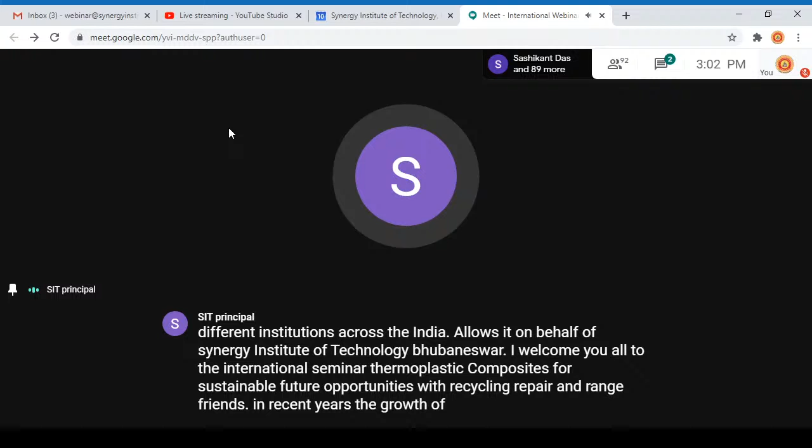Friends, in recent years, the growth of continuous fiber-reinforced thermoplastic composites shows opportunities in transportation, aerospace, defense, industrial, renewable, and sporting goods. The global market of CFT is expected to grow at a compound annual growth rate of 9.5% from 2017 to 2022. The major driver is the growing demand for thermoplastic composites in different industries due to its higher performance and environmental benefits.

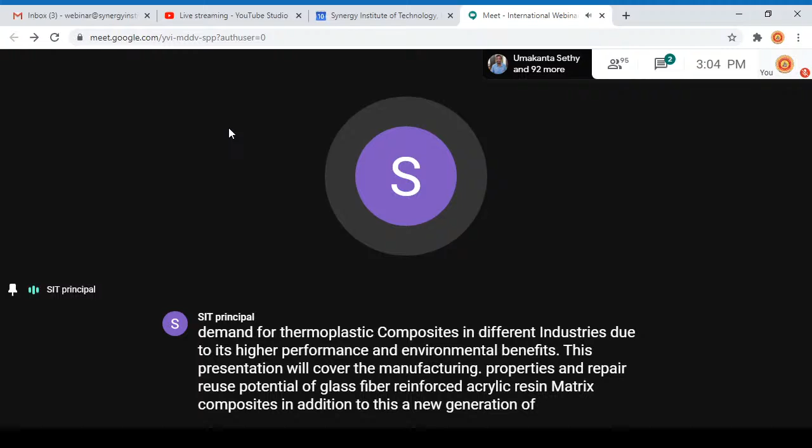This presentation will cover the manufacturing, properties and repair-reuse potential of glass fiber reinforced acrylic resin matrix composites. In addition to this, a new generation of low-cost thermoplastic fiber metal hybrid laminates will be discussed by our esteemed speaker.

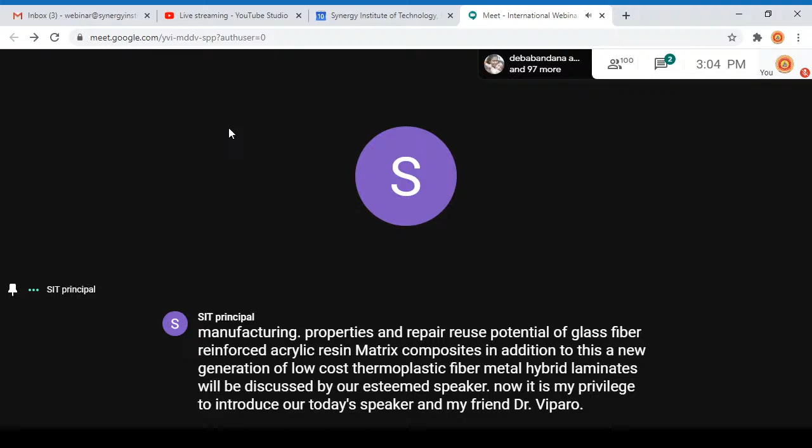Now it is my privilege to introduce our today's speaker and my friend, Dr. Dipa Roy. Dr. Dipa Roy obtained her BTech and MTech in Polymer Science and Technology from University of Calcutta, India. She completed her PhD from Indian Association for the Cultivation of Science, Jadavpur University, India in 2002.

Dr. Roy started her job as lecturer in the Department of Polymer Science and Technology, University of Calcutta in 2005 and continued till September 2011. In 2011, she joined the Irish Centre for Composite Research at University of Limerick, Ireland as research fellow up to 2016.

She successfully completed 7 Government of India funded research projects as principal investigator. She has supervised 12 PhD students and 8 MTech students. Presently, Dr. Roy is a faculty at School of Engineering, University of Edinburgh, Scotland, UK. Now, I request Dr. Roy to present her webinar topic.

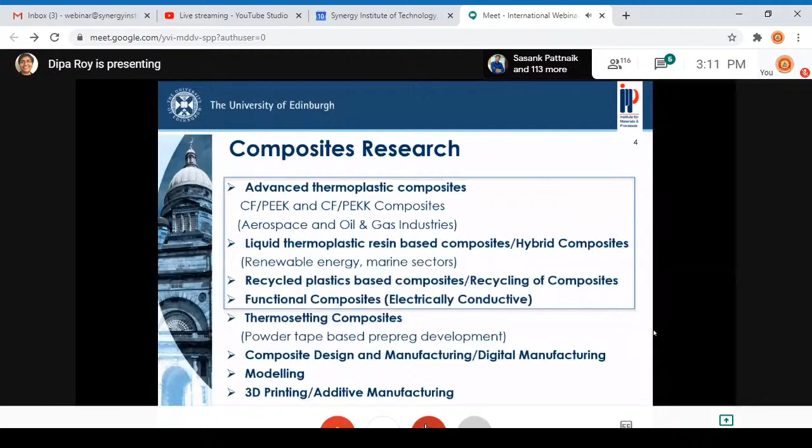Modeling is another very important area of composite research - almost all experimental work is somehow linked with some modeling activities. And also a lot of focus is on additive manufacturing or 3D printing. These are our general composite research activities in our group.

I would like to mention something very interesting in this context. We have strong links with different industries, so our research is a combination of fundamental as well as applied work. There are a lot of industrial PhDs - we work with some of these industries, and many PhD projects are actually funded by them.

Now I am coming to today's presentation topic: in situ polymerized liquid acrylic resin-based thermoplastic composites. We are all familiar with composites, and as Dr. Raut already mentioned in her inaugural speech, composites are now growing everywhere. Epoxy composites or thermosetting composites are more commonly used in structural applications, but all thermosetting composites are non-recyclable in nature, so they are not really helping the environment.

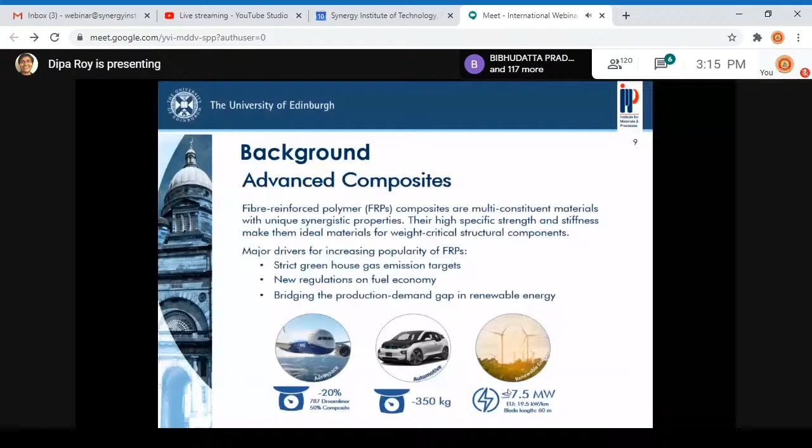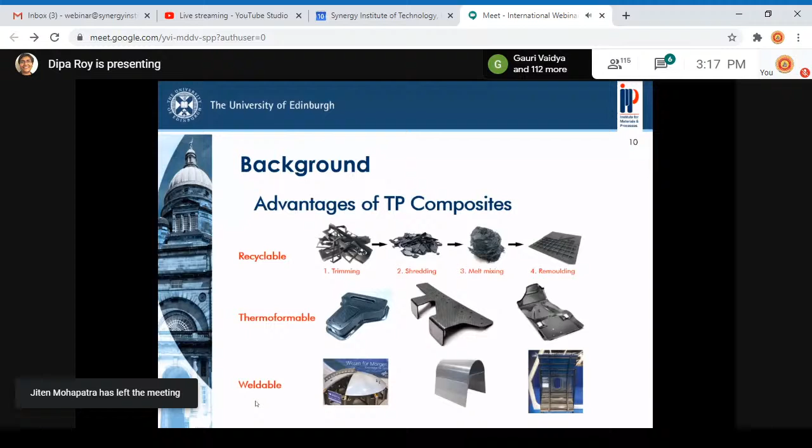Another important advantage is the welding or joining ability of thermoplastic composites. That's a very big area of research, because whenever we join thermoplastic composites, there is always a weak point along the joining line or bond line. Still, a lot of welded products are being used, and a lot of research is ongoing on how to improve the welds or bond strength. These are the main advantages making thermoplastic composites a really good candidate for future products.

But there are some challenges associated with thermoplastic composites. We know thermoplastics are available either as powder, pellet, or granule, but they are all high molecular weight. Because of this high molecular weight, they have very high viscosity. That's why it is not really easy to manufacture thermoplastic composites with fibers.

So we have to use high heat and pressure to wet the fibers or impregnate the reinforcement materials with this matrix. On a scale of viscosity, thermoplastics are placed very high up, much higher in viscosity compared to conventional thermosetting resins, which are much more liquid.

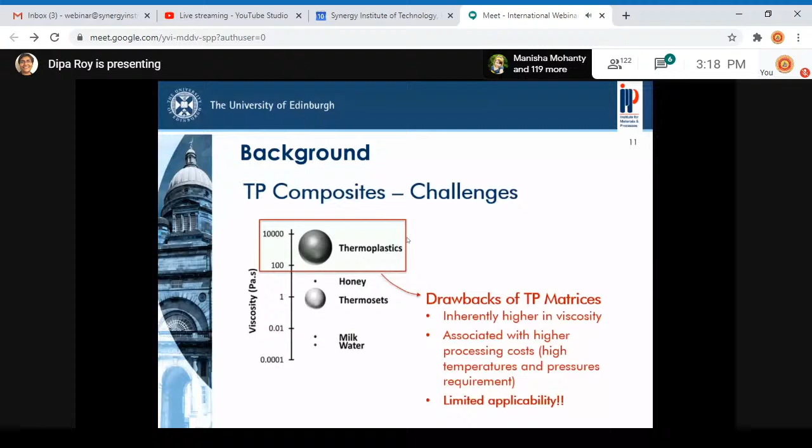Thermoplastics are more conventionally used in practice for many decades now. We mix thermoplastic pellets with short fibers, extrude them into small pellets, and then manufacture the product by compression molding or injection molding. That's a more conventional practice.

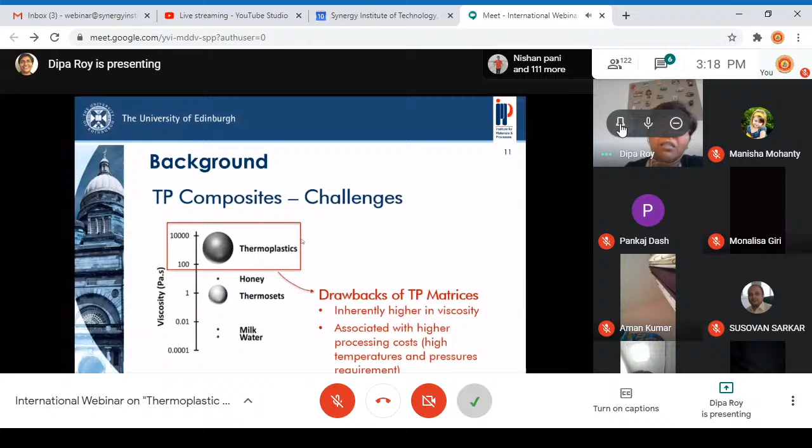But if we want to manufacture structural composites with continuous fiber reinforcement for high mechanical load-bearing ability, their viscosity plays a big role. That's why there are some challenges associated with manufacturing high-performing continuous fiber reinforced thermoplastic composites.

Recently, in the last few years, there has been a lot of development on thermoplastic tapes, where we have carbon fibers reinforced with high-performing thermoplastics like polyether ketone or polyether ether ketone. But these kinds of tapes are very expensive because of the high viscosity of thermoplastic resins.

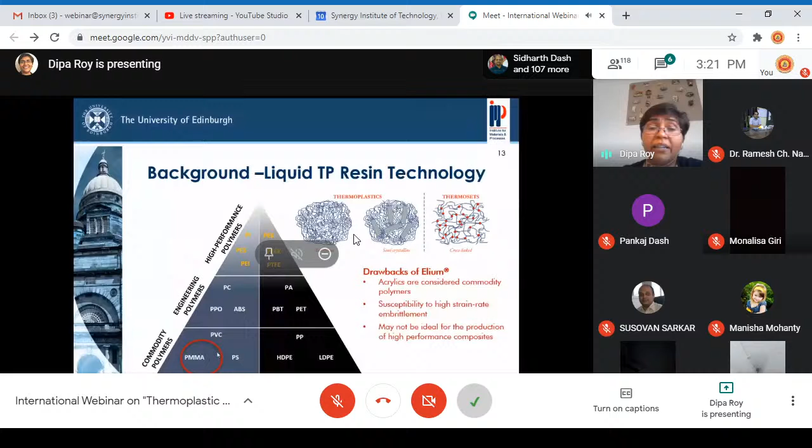If we compare this performance on the amorphous material scale for polymers, at the bottommost level we have commodity polymers like polyethylene, polypropylene, polymethyl methacrylate. Then come the engineering polymers, and finally the high-performing polymers like PEEK, PEC, and others. Acrylics actually sit at the very bottom; they are commodity polymers and purely amorphous.

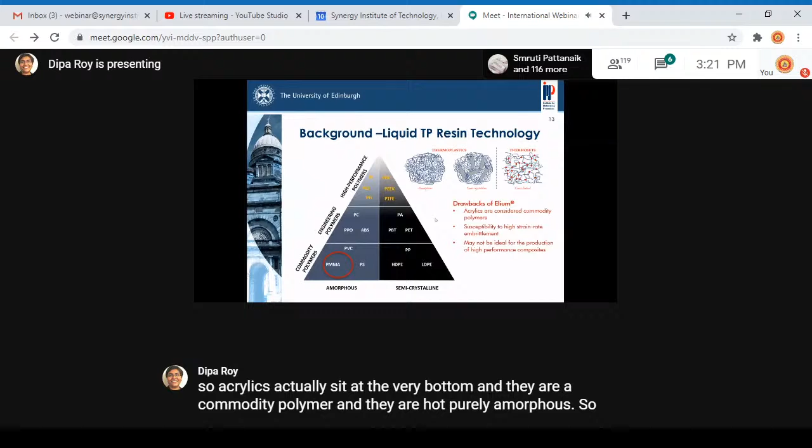When we talk about composites, in most cases if they are thermoset, we know they are cross-linked. Being cross-linked, they have their own inherent load-bearing ability, so they can perform well in combination with continuous fiber reinforcement.

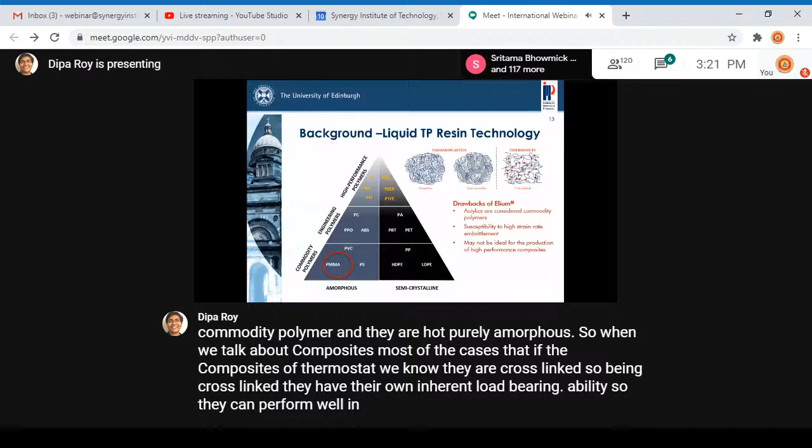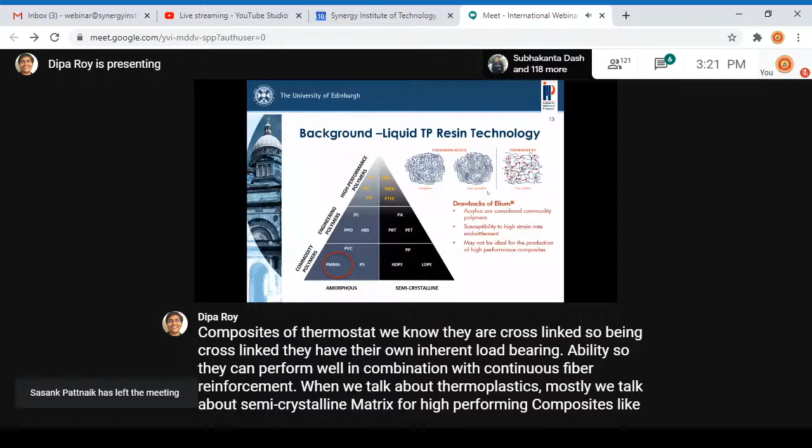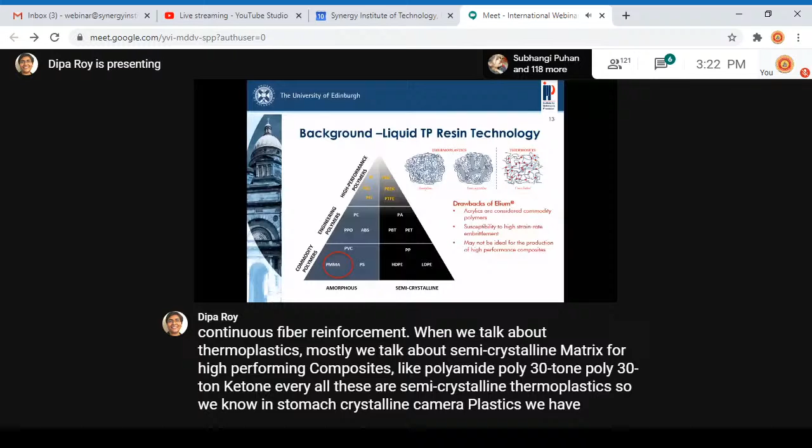When we talk about thermoplastics, mostly we talk about semi-crystalline matrices for high-performing composites, like polyamide, polyether ketone, polyether ether ketone; all these are semi-crystalline thermoplastics. In semi-crystalline thermoplastics, we have crystalline domains, so we get much higher mechanical properties. They are quite good and comparable with cross-linked thermosets.

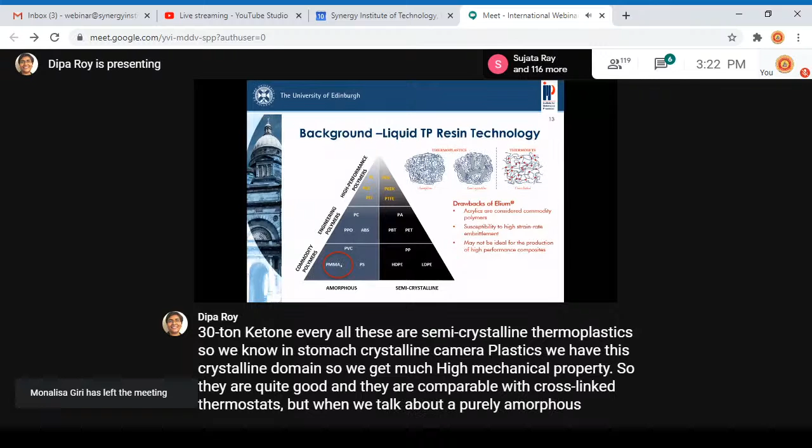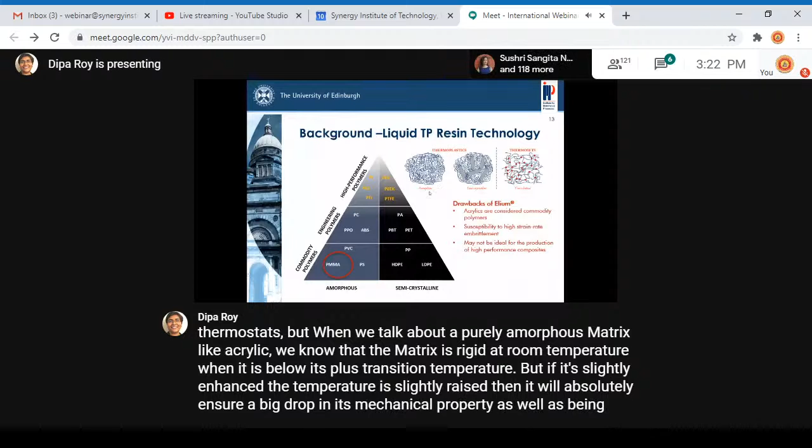But a purely amorphous matrix like acrylic is rigid at room temperature when it's below its glass transition temperature. If the temperature is slightly raised, it will show a big drop in mechanical property. Being purely amorphous, it also will not have good chemical resistance. These are all areas where we don't know how these composites are going to behave in future.

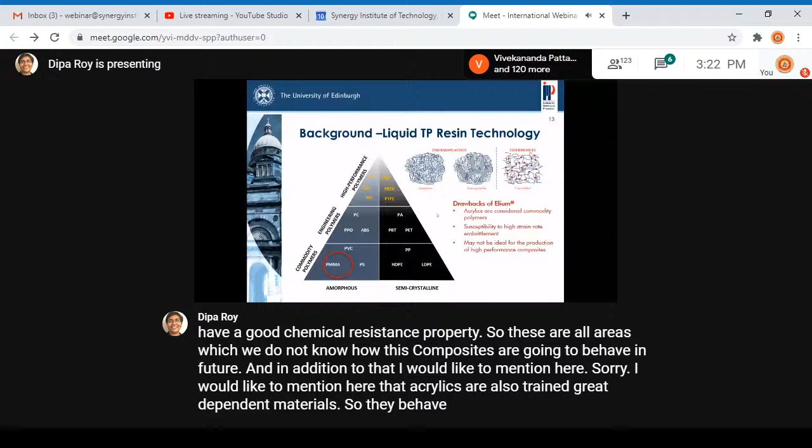In addition, I'd like to mention that acrylics are also strain rate dependent materials. They behave in a highly brittle way under high strain rate loading. In low speed testing, or lower strain rate testing, they behave in a ductile way, but with an increase in strain rate, they behave in a more brittle way.

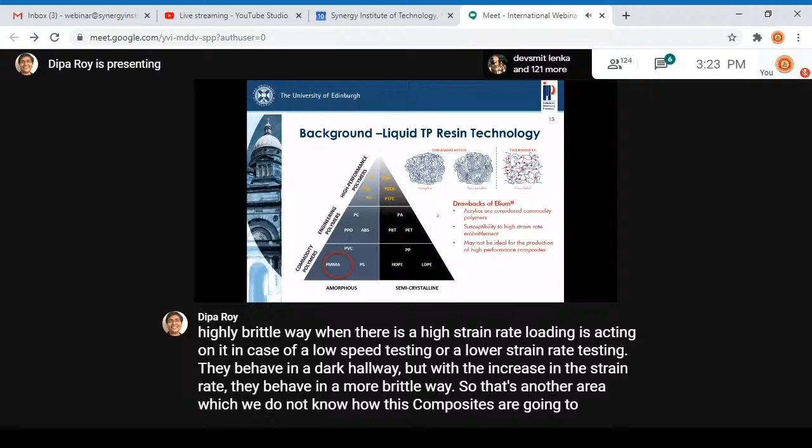That's another area where we don't know how these composites are going to behave in case of impact or other kinds of high strain rate testing.

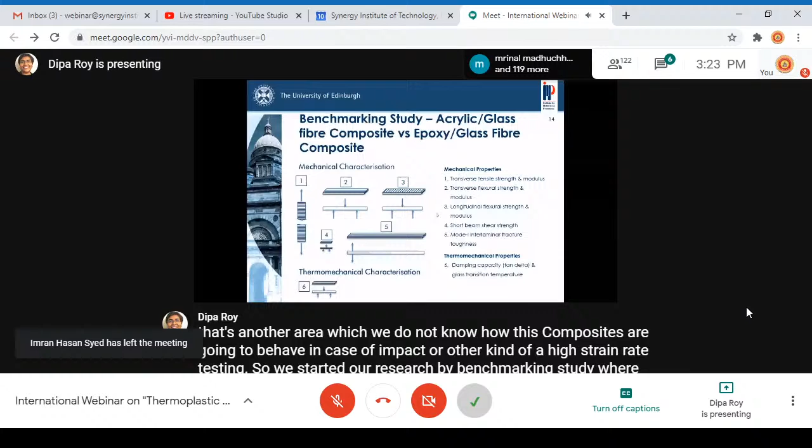So we started our research with a benchmarking study where we compared an acrylic composite with epoxy, a standard epoxy composite, using glass fiber as the reinforcement. Here I would like to mention that in any composite, we all know the interface is the most critical point.

The interface has to be strong so that we can have effective stress transfer at the interface of the fiber and the matrix. So when we select the reinforcement fiber, here glass fiber, it is important that it has the right sizing agent which can actually interact with the matrix.

So we selected a glass fiber reinforcement fabric which has multi-compatibility, meaning it is compatible with epoxy resin as well as acrylic resin. It has sizing coupling agents with organic R groups which are chemically compatible with different matrices.

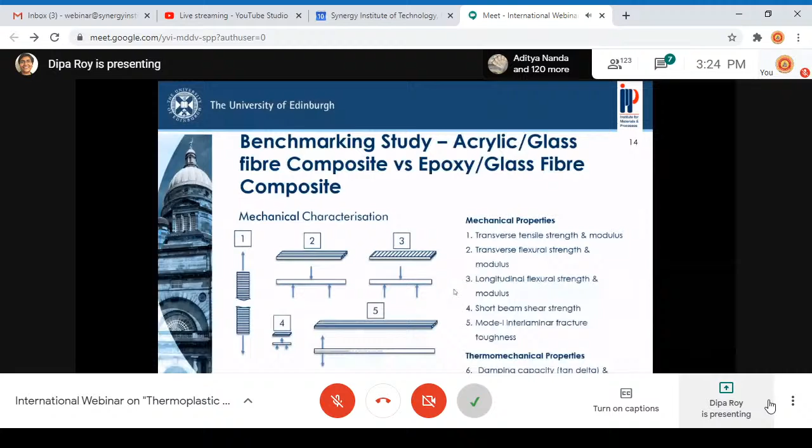Since our acrylic resin is a liquid monomeric resin, it polymerizes in situ during composite manufacturing. So there is a high opportunity of forming covalent bonds between the resin and the sizing agent during manufacturing. That's a big advantage of acrylic resin, because we get a chance of forming covalent linkage between the sizing agent and the matrix, which can help in effective stress transfer at the interface.

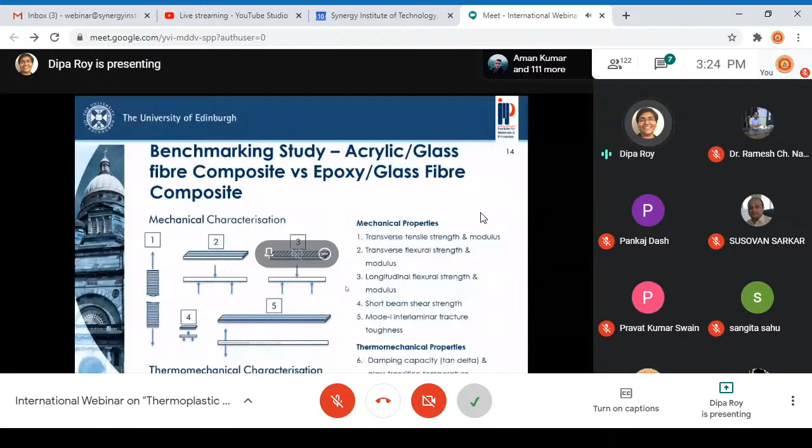Since it's a tool-based VARTM process, we can have a very good quality consolidated laminate, and the repeatability is very good, with void content or defects minimum compared to conventional tabletop VARTM. So we used this acrylic resin from Arkema, and a standard epoxy resin.

We manufactured two laminates, very similar, keeping everything the same - the glass fibers, the layup, number of layers, the layup sequence - only changing the matrix or resin. We saw that in case of epoxy composite, the total filling time for the mold was about 27 minutes, which is quite standard with any standard epoxy resin.

Whereas with acrylic, the main reason is the very low viscosity. So it flows really fast, and the overall impregnation is very quick, and the manufacturing can happen in much shorter time. Since everything was done in a very similar way, we did a comparison, and there was a clear advantage of using this kind of thermoplastic resin.

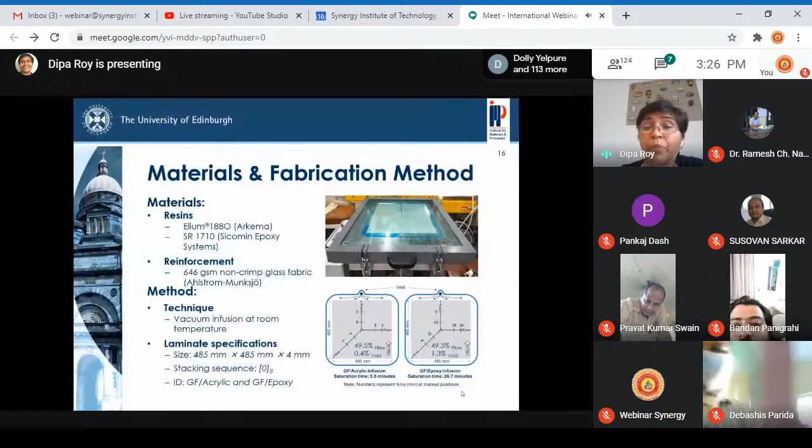Now we measured the glass transition temperature of both composites. We tried to select an epoxy matrix which is quite close, because epoxy resins can have TG from 50-60 degrees up to 180 degrees. So we tried to select a grade of epoxy close to the acrylic resin. The glass transition was about 119 degrees for epoxy, and for acrylic it was 106 degrees - pretty close.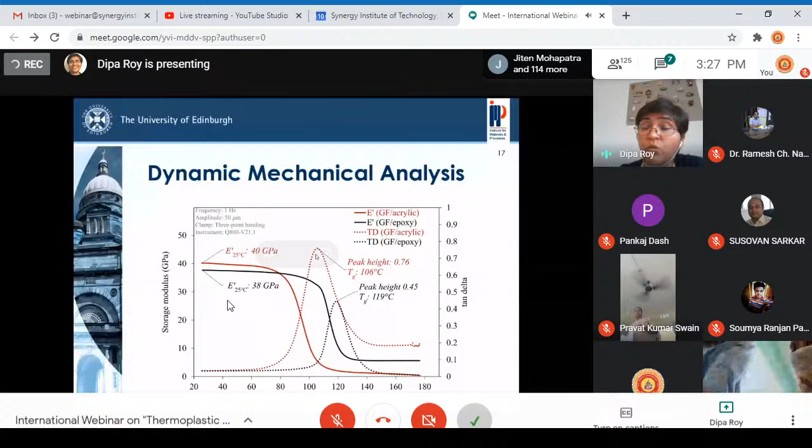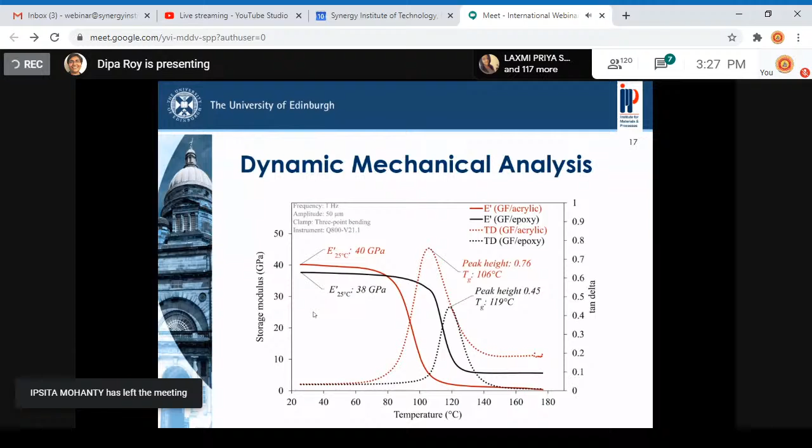What we expected was a high damping property for this acrylic composite. We can see the damping parameter tan delta is much higher - this is expected from a thermoplastic composite, so it was no surprise. But the storage modulus values were pretty close, so overall the indication of mechanical property or elastic component of the composites was quite close, which is a good positive sign. I will not go into detail of the mechanical characterization, but this is just an overall view of what we observed.

When we compared the mechanical properties - tensile strength, both longitudinal and transverse, interlaminar properties, damping capacity - between acrylic composite and epoxy composite, they are pretty much at par, quite close. The only difference was the transverse tensile property for acrylic composite was about 33% higher, which was quite significant. Damping capacity was higher as well, as we discussed previously.

But this transverse tensile property is dictated by the matrix, dominated by the matrix behavior. So clearly this result showed that acrylic matrix was performing quite well in the transverse direction. This was really a very good observation, and we were very happy to see this result.

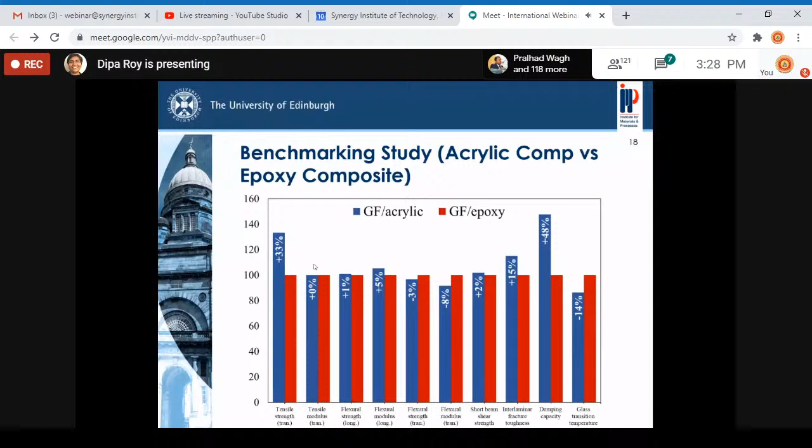We also investigated the interlaminar fracture toughness of both composites, acrylic and epoxy, following ASTM D5528 testing - this is a double cantilever beam test, showing how the samples look. By doing this test, the initiation toughness of acrylic was marginally higher than epoxy, and the propagation toughness was quite higher, significantly higher than epoxy.

As we expect, the fracture toughness of the acrylic composites are quite good, as we expect in case of thermoplastic composites. This was observed because this testing is at quite slow strain rate. We use about 2 millimeters per minute, which is quite low. With that low speed of testing, acrylic behaves in quite a ductile way. So that played a big role, and we saw a big advantage of this higher fracture toughness.

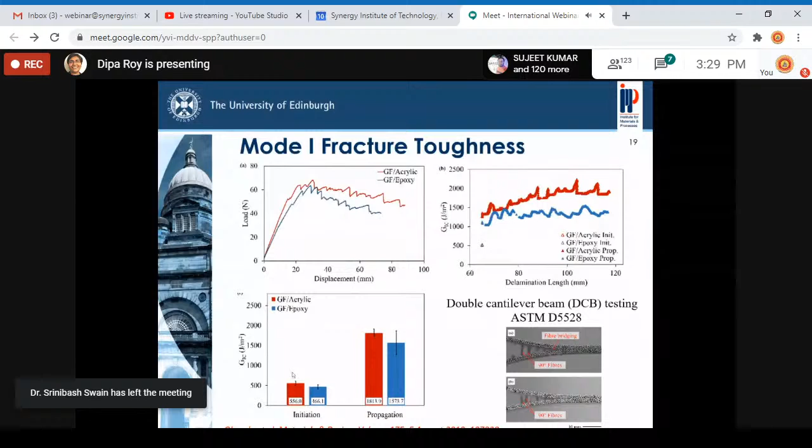Apart from this mechanical characterization, we also wanted to find out how this liquid resin actually helps in repair or joining activities. Because it's a monomeric resin, there can be a very good opportunity to bond in situ during the repair, joining, or welding. That's an advantage which we do not get in case of conventional thermoplastics.

So we did a very simple experiment. This was a master's project. We manufactured similar equivalent laminates, but one laminate we manufactured in one step: we took 8 layers of glass fiber and infused the liquid resin. Then the resin polymerized in situ and we got the consolidated laminate. And we manufactured the same laminate in 2 steps.

In 2 steps means first we took 4 layers and infused them with liquid resin. Then it was polymerized, and we used that polymerized laminate with 4 dry glass fabrics, and again reinfused the resin. So in the second step, the whole laminate was consolidated together and we got the laminate. So the first laminate was done in 1 step, this one was done in 2 steps by 2-step resin infusion.

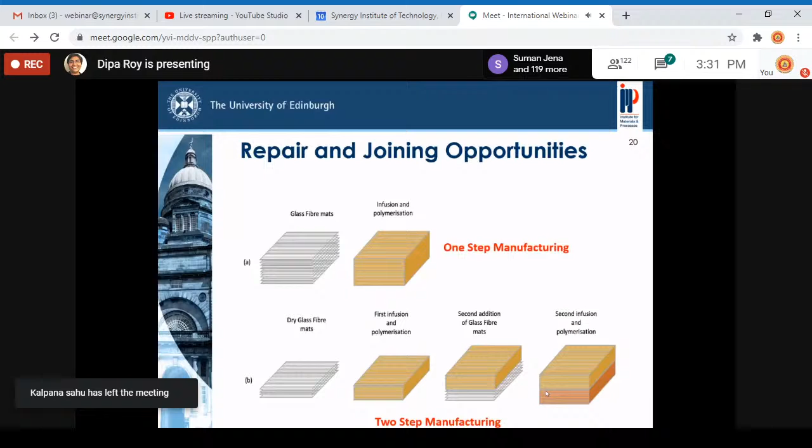Now we are calling this second one the bonded laminate. We characterized these laminates to understand how having this joining layer in the mid-plane would affect the mechanical properties. Now the observations were very, very interesting.

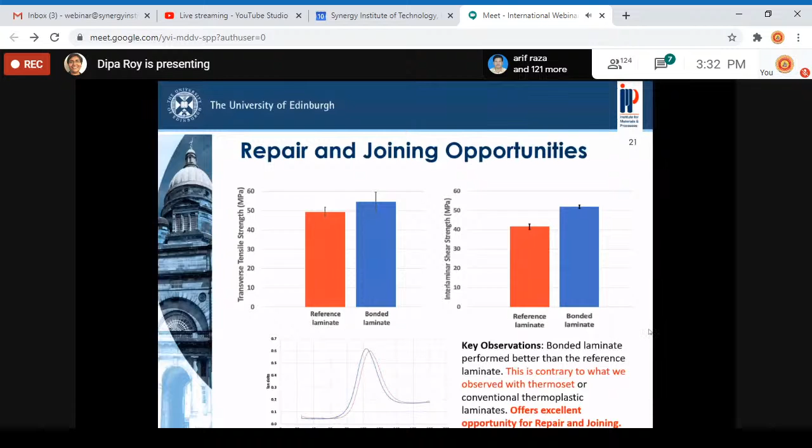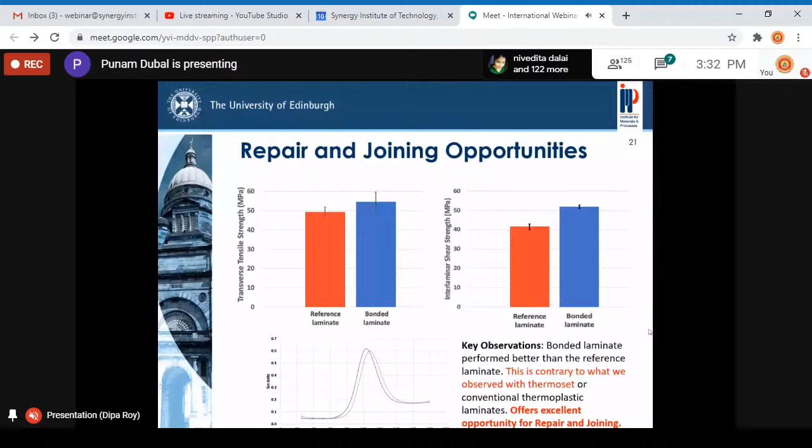And why did this happen? This is a very interesting observation, and we were very delighted when we saw these results. So what's happening in the first case when we are manufacturing the laminate: in the first go, the resin is being polymerized and we get a polymerized laminate. So this is the first step of the infusion.

Now when we reinfuse it in the second step, again the liquid monomer is being infused with the first laminate. This liquid resin is actually acting as a reactive solvent on the first laminate. Because of this resin, at this interface or joining plane, the matrix is being partly dissolved by this infused liquid resin. This is an advantage of having the amorphous matrix, because an amorphous matrix is highly susceptible to attack by solvent. So here this liquid resin is acting as a reactive solvent. It dissolves the polymer near the interface, and then it polymerizes in situ. So we are getting a semi-interpenetrating polymer network at the interface.

So this is enhancing these properties. Instead of having a weak bond line, we have a very strong bond line where we have this semi-IPN kind of formation. This was theoretical - we thought this would happen - but with the experimental results, we saw exactly the same results. So this opens up a very good opportunity for repair and joining of this kind of laminate.

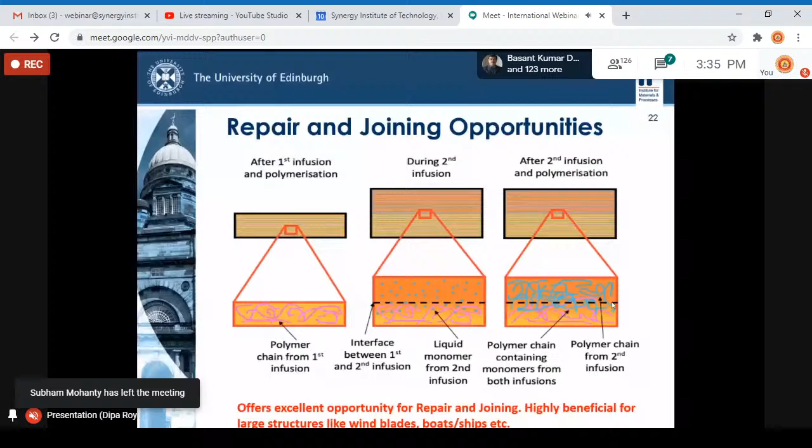Now, in spite of having so many different opportunities and advantages with the acrylic resin, there are some concerns about how this acrylic matrix is going to perform in high-performing composites. This is not actually time-tested, and a lot of queries are there from industries - if we use acrylic matrix composite, how they will perform in the long run, we do not know. So there are a lot of opportunities to modify the matrix to bring some more reliability on the performance of the matrix in long-term applications.

As we discussed before, we have this amorphous matrix, whereas we don't have any cross-link or any crystalline domain. So they are very susceptible to heat distortion or chemical attack. There is an opportunity to enhance the performance of this amorphous material so that they can perform well in more demanding environments - in high loading conditions, high strain rates, or in case of higher service temperature.

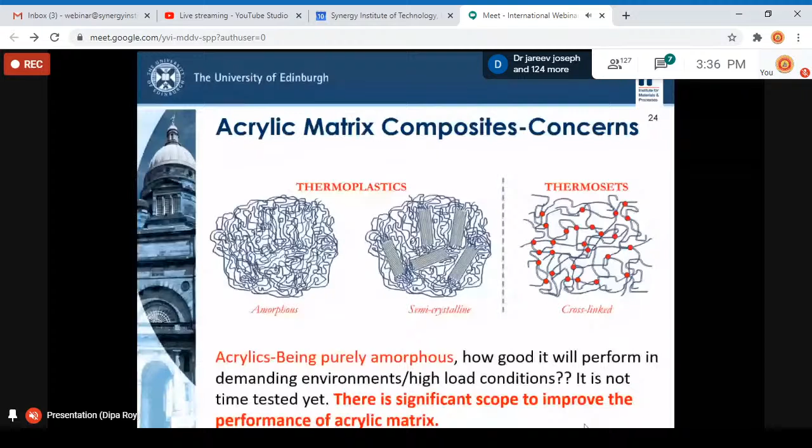This was something we actually took as an extension of our first set of work. We had to select some modifier polymer, because the main purpose of the modification is enhancement of the property, but at the same time, you have to keep in mind that the recyclability should not be actually lost. We have to retain the recyclability, which is critical for future sustainable materials. At the same time, we should not increase the viscosity of the resin significantly so that manufacturing is hampered, because the room temperature liquid resin infusion is critical. If we increase the viscosity by modification, that is not going to help the infusion process. So there is a limitation on how much we can modify.

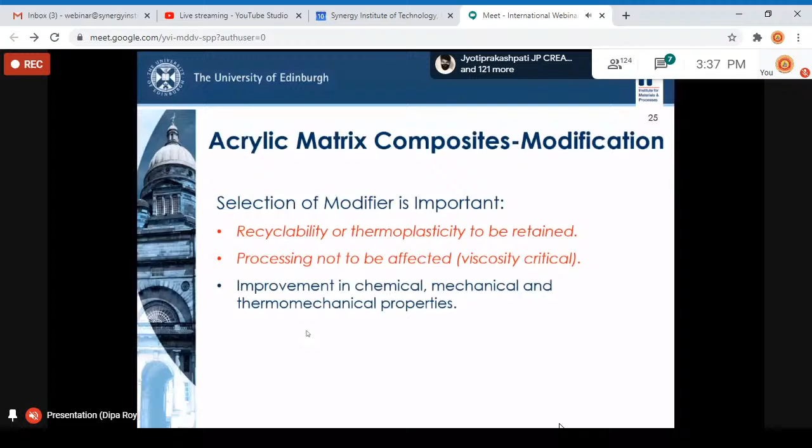So these two are the most critical considerations when we thought about this modification. We have to retain these two, and at the same time, we have to have some improvement in the chemical, mechanical, or thermomechanical behavior of the product.

Now we selected a material, polyphenylene ether. We worked with SABIC actually - this PPE is from SABIC. We have some working relation with SABIC, so we got materials from them. We selected polyphenylene ether with the functionality at the chain ends, which was very helpful in producing some reactive blending during the composite manufacturing.

Now, why we selected polyphenylene ether? We already know that it's a very well-performing engineering thermoplastic, but the main problem is that they have very poor processing characteristics - they are very hard to process. In spite of having very high good mechanical property, they are poorly processable. That's why most of the time, polyphenylene ether is used as a modifier with other resins. This is a well-established modifier for many thermosetting resins, but using this polymer as a modifier for acrylic resin has not been tried before. So this was another interesting study.

We did not really know whether... sorry, do you have any noise? Sorry. Okay, so...

Apart from that, the glass transition temperature of polyphenylene ether is 160 degrees, which would be helpful for enhancing some overall thermomechanical behavior of the acrylic matrix composite. This was the main motivation why we selected polyphenylene ether, and it has got the functionality we wanted for reactive blending with the acrylics.

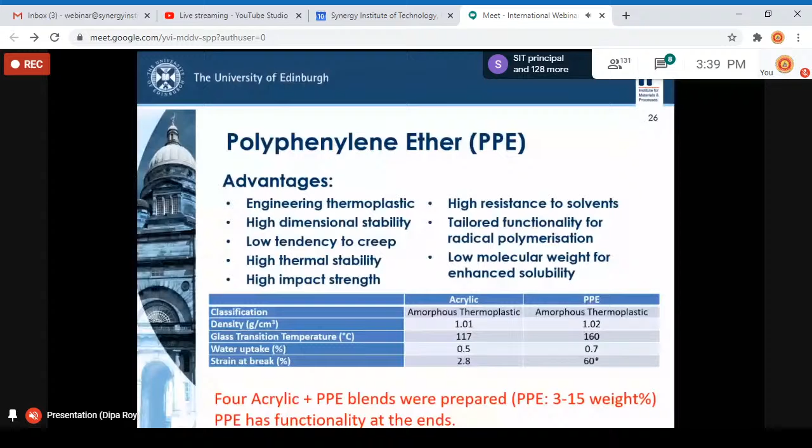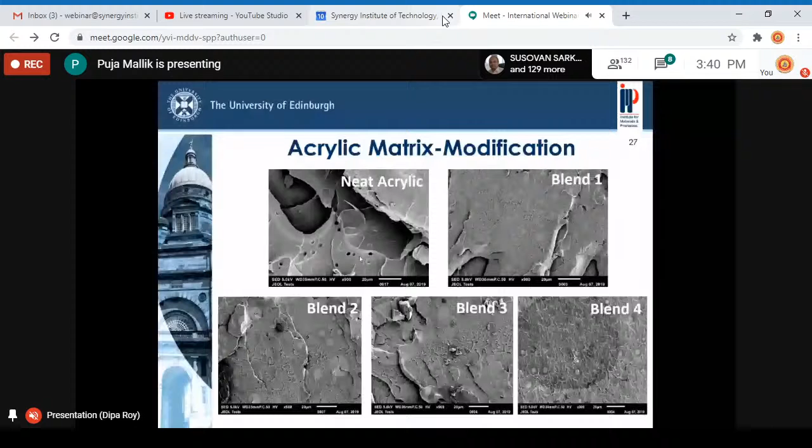Now, we actually prepared 4 blends, varying the ratio of this polyphenylene ether between 3 to 15 weight percent. You can see here some scanning electron micrographs of the blends. The first one is the neat acrylic - this is the pure acrylic resin. These are some voids - this resin is very prone to foaming when we want to cast at room temperature, so it's very hard to prepare pure acrylic samples. Now, when we have the blends, the foaming tendency is reduced significantly. So we don't see any void in case of the blends, but we can see these zones.

I'm not sure if you can see properly. There are some small zones here which are actually very well bonded with the acrylics. Now, with the increase in percentage from 3 to 15%, in this second phase, you can see how it looks quite different. But what we can see from these micrographs is that there is a very well bonded polyphenylene ether dispersed phase present in the overall matrix.

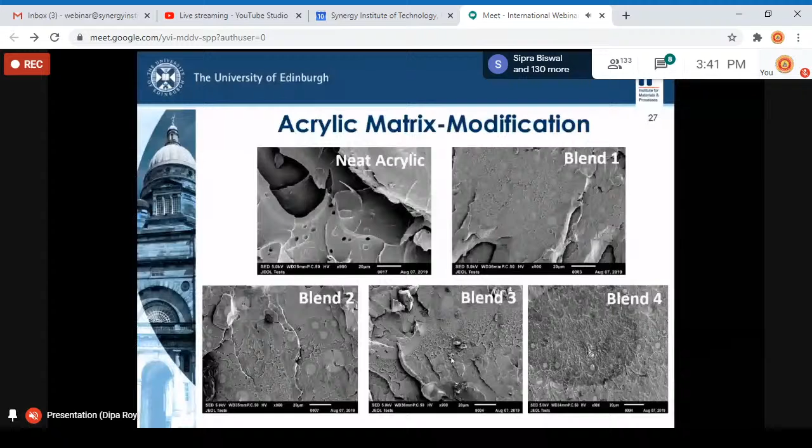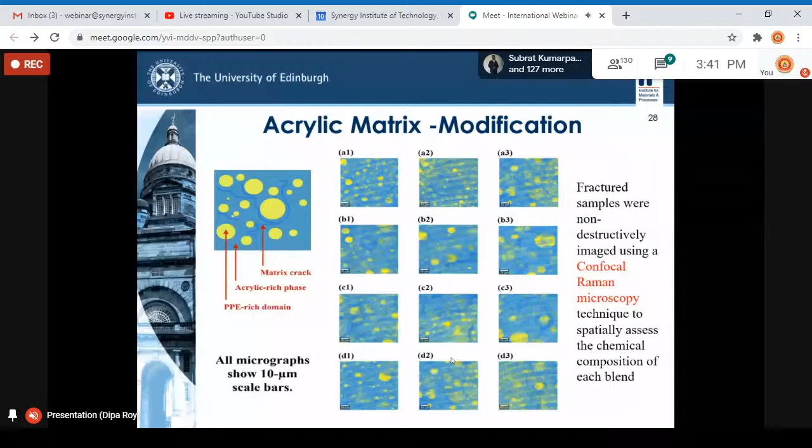So now, this is another micrograph, generated by confocal Raman microscopy. Here the blue phase is the acrylic phase and the yellow phase is the polyphenylene ether. We can see here how more or less uniformly this polyphenylene ether is dispersed in the acrylic matrix. We also tried to understand the chemical composition by Raman spectroscopy, but we haven't yet completed those tests or analysis, that's why I haven't included that in my presentation. But overall, this gives a very clear picture of how this polyphenylene ether is actually dispersed in the acrylic matrix.

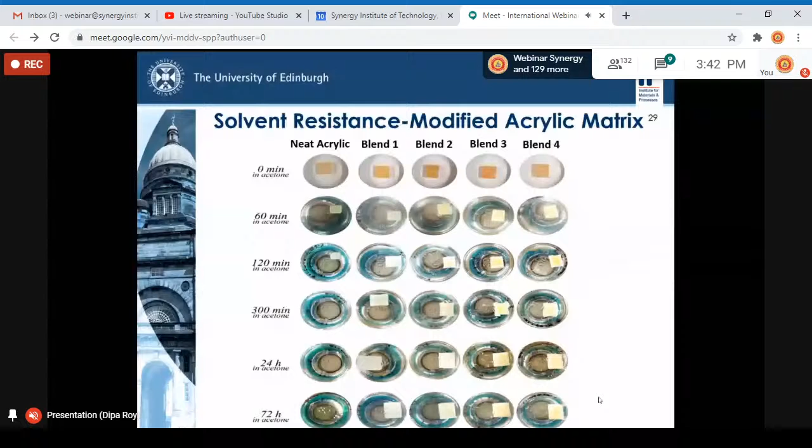So that was a very positive indication that we are enhancing or improving the solvent resistance of this matrix, which might be really beneficial when they are being used in some demanding environment, since these composites are being used in some demanding environments.

We selected one blend with 5% polyphenylene ether and tried some very preliminary mechanical testing with the unreinforced matrix. These are not composites, these are unreinforced modified acrylic matrix. With some simple flexural testing, we saw a significant enhancement in the modulus of this blended material. Even with 5% of polyphenylene ether, the strength increased significantly from 30 to about 54 MPa. This was a good indication that we are going to see some enhancement in the mechanical properties as well.

But this is a pure unreinforced matrix, so we do not know how this enhancement is going to be transferred in the composite, because in composites we have fibers present, and the behavior of the matrix is very much controlled or influenced by the presence of the fiber. But anyway, this was a very good indication that we can have some enhanced mechanical performance in terms of the matrix as well.

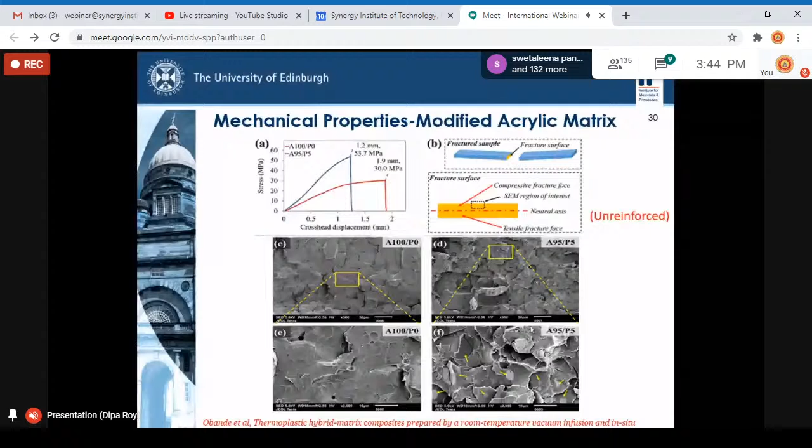Now we saw some micrographs of the fracture surface. This is how we fractured the sample, and we saw these micrographs with some zones of polyphenylene ether, but the ductility was still there. We can see the flaky nature of the matrix, which is quite visible in case of pure acrylic - that was still there in case of these blends, but at the same time we saw some significant enhancement in the strength or mechanical behavior of the blends.

Now we did some solvent resistance tests of the composite. The previous one was the unreinforced matrix, now we use some composite. P0 means there is no modifier - we have this glass fiber and pure acrylic matrix, and the other one is glass fiber, acrylic, and 5% of our modifier polymer, PPE.

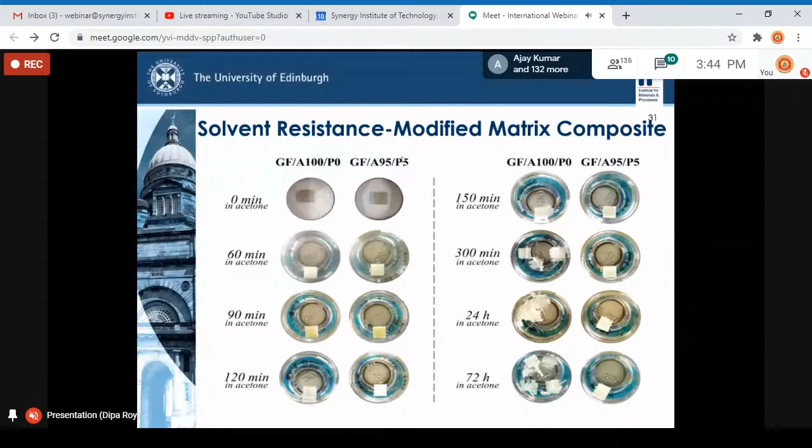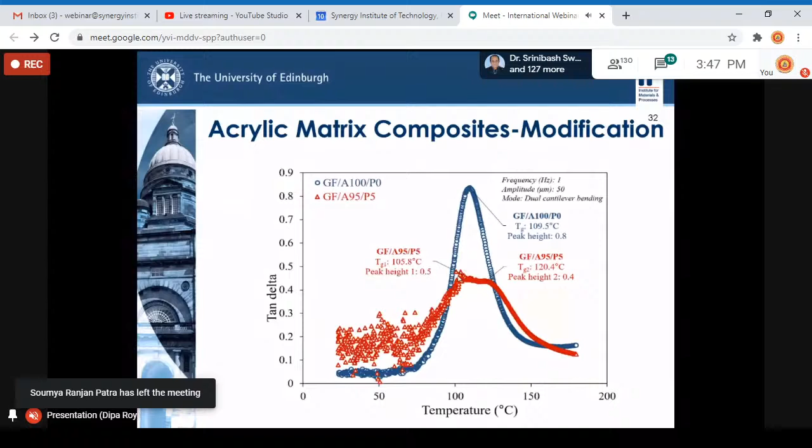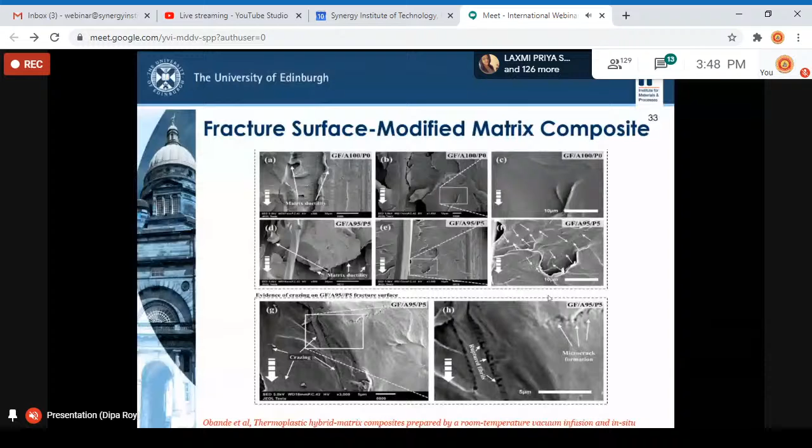We did a lot of different characterizations, and this work was done in collaboration with the chemistry department, Dr. Jennifer Gordon, and her PhD student, Veronica. They carried out a lot of testing on NMR and GPC.

After significant experimental characterization, we concluded that whenever we incorporate this reactive PPE, we keep the thermoplastic matrix overall, but we create some cross-linking, giving rigidity to the material, which enhances the solvent resistance property, while the overall material remains thermoplastic. So we are able to deform, repair, or reshape the materials. We are not losing recyclability, but we incorporate some rigidity in the overall matrix through these small cross-linked regions.

We did a lot of different characterizations. I haven't covered everything, but the thermal degradation behavior was enhanced. We saw some change in the exotherm in DSC, which was because of the reaction happening between the functional polyphenylene ether and the acrylic. There were quite a few different mechanical properties as well. This was a very new observation for us because we could retain the thermoplasticity, but we could also enhance some of the drawbacks of the acrylic matrix.

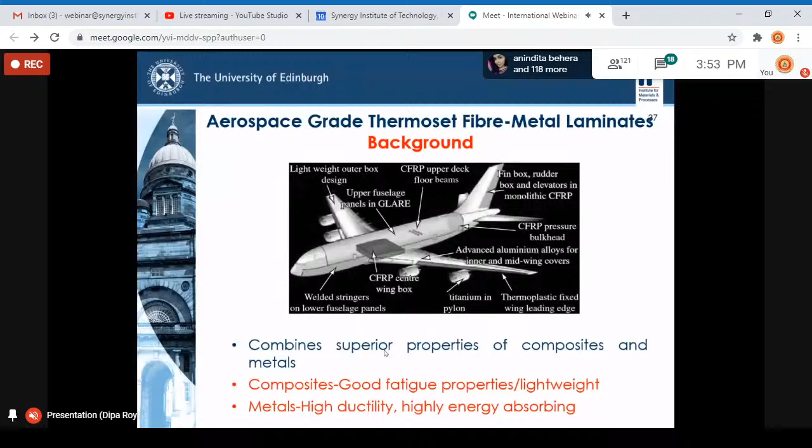GLARE is one material panel used for aircraft. There are three different types of these hybrid fiber metal laminates, all thermoset epoxy based, and they are called GLARE.

Glare is for glass fiber, ARALL is for aramid fiber, and CARALL is for carbon fiber. So you can have different fiber reinforcement, mostly with aluminum alloy, different aluminum alloys, and epoxy resin.

Now, these fiber metal laminates are manufactured in autoclave and they are pre-preg based. So they are very, very expensive materials, and they started since the 1980s, but still they are limited in aerospace. So there is absolutely no diversification of the application of these fiber metal laminates because of their cost and their manufacturing.

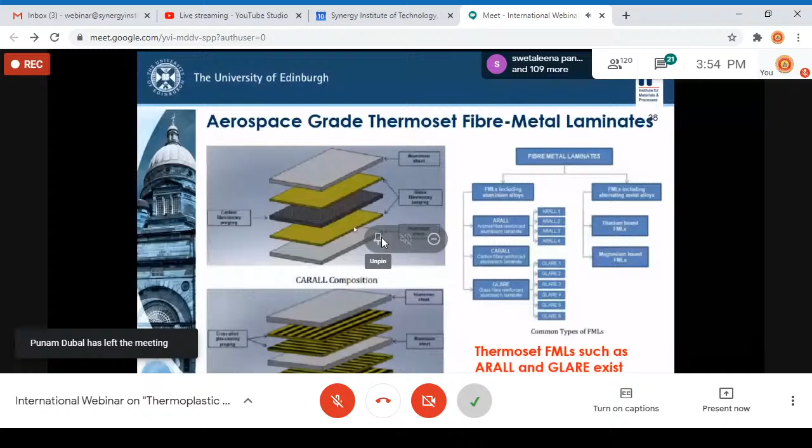Also, there is another important point to mention. When these hybrid laminates are manufactured, they are cured normally about 160 degrees, and aluminum has a very different thermal expansion coefficient than the composites. So during this manufacturing, there is also residual stress at the interface of the composite and the metal. Those residual thermal stresses can act as a point of failure in application during the service life. That's why a lot of other post-processing steps are carried out in case of these laminates, to make them less prone to failure from that interface.

But because of all these reasons, these thermosetting hybrid laminates are limited to aerospace.

Now with this liquid resin, we got an opportunity to diversify this and to manufacture thermoplastic fiber metal laminates by liquid resin infusion at room temperature, which is the main advantage, because we are doing all the manufacturing at room temperature. So if we can manufacture such hybrid laminates at room temperature, then we can avoid having those residual thermal stresses at the interface, because the curing is not involving any high temperature. So in spite of having a mismatch in the thermal expansion coefficient of the composite layer and the metal layer, we can still manufacture effectively without adding those manufacturing stress factors.

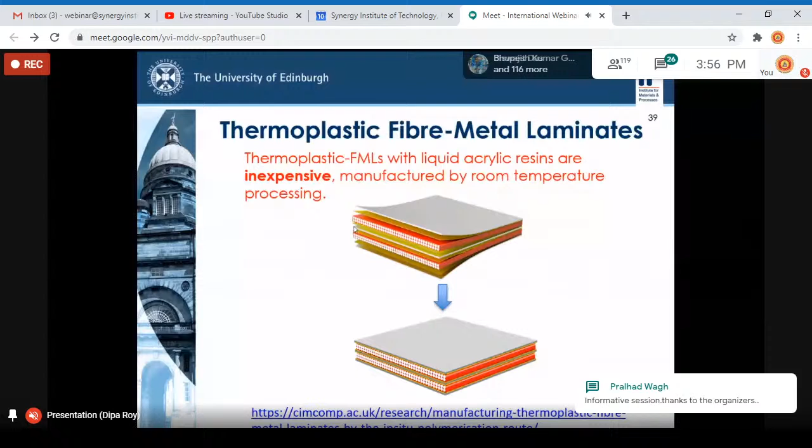This work was actually funded by the EPSRC Future Composites Manufacturing Research Hub feasibility study, and we manufactured successfully these thermoplastic fiber metal laminates.

Now, in case of such hybrid materials, the most important consideration is the interface, because we are trying to bond the composite with the metal. In case of liquid acrylic resin, we are actually manufacturing and bonding in situ during the composite fabrication. So it is very important that the surface of the metal is prepared enough so that it can have the right bonding with the composite, because they are very dissimilar materials, chemically very different, so they don't have any affinity to bond with each other. That's why we have to have the right surface treatment of the metal alloy to make it ready for bonding.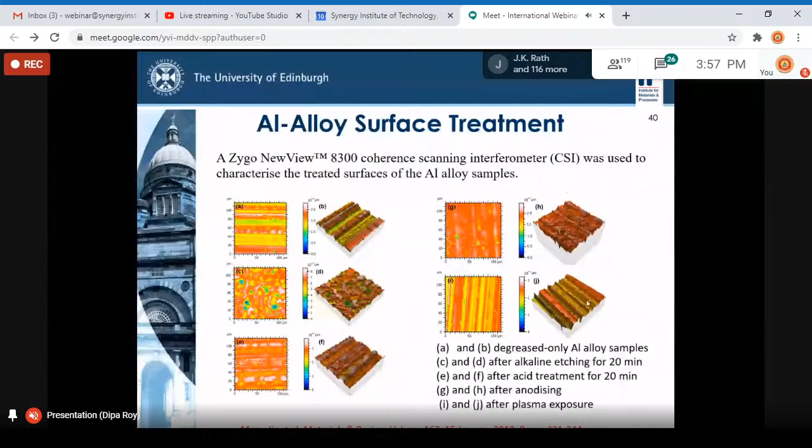Now we tried different chemical and physical treatments. So first one is, you see here, this is actually the degreased aluminum alloy surface. We didn't do anything else on this surface, it looked like this after degreasing and cleaning. Then we tried alkaline treatment, acid treatment, anodization, which is a more industrial technique, and also some atmospheric plasma. With all these different techniques, we then investigated the surface morphology with the scanning interferometer, and also how the surface of the aluminum alloys look like. This is already published in 2019.

So with those surface treated alloys, we then manufactured by room temperature vacuum resin infusion, using the same technique we used in case of glass fiber composite alone, and this was all done at room temperature. The aluminum alloy sheets had very fine holes so that the resin could permeate through them, so we could have the right wetting throughout the bulk of the composite.

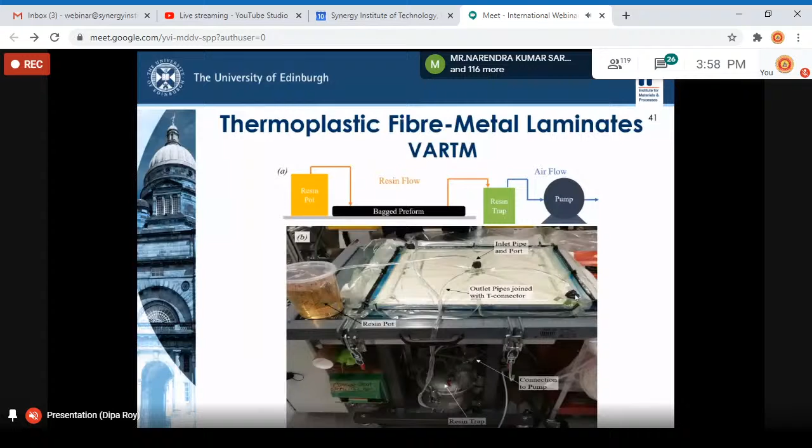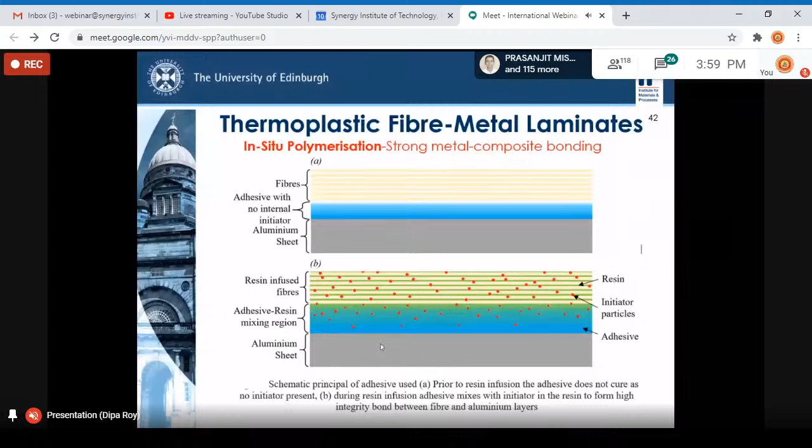And we measured some mechanical properties. So this was some of the properties, preliminary studies, already published in this paper. Here the metal was alkali treated, and we compared the flexural modulus and the flexural strength with the standard glass fiber acrylic composite. We saw that the modulus was quite high and the strength was slightly lower.

In case of interlaminar shear strength, there was a reduction in the interlaminar shear strength of this hybrid laminate, the fiber metal laminate. This was lower than expected, so the next step was how we can enhance this interfacial bonding, because the performance of the hybrid composite is completely dependent on the interface. If the interface is not strong, these fiber metal laminates will not be able to bear the load properly, so it is critical to have the optimum interface.

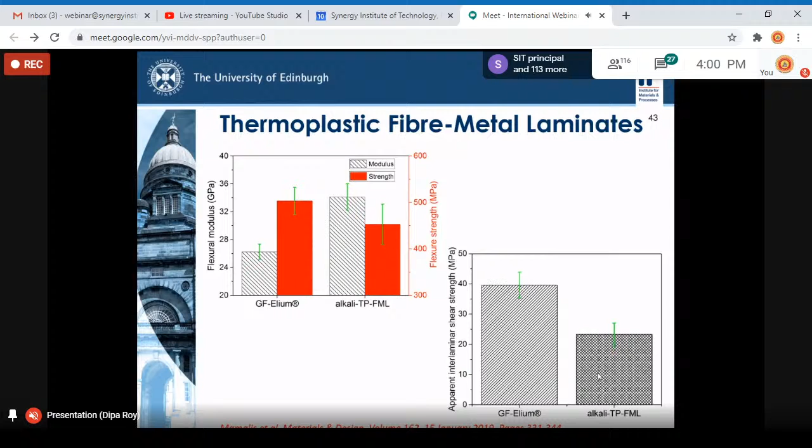In case of a purely glass fiber acrylic composite, this is a homogeneous system, having only the glass fiber and the acrylic resin, so it can have very good interfacial bonding. Whereas in case of a fiber metal laminate, it's a very heterogeneous system, having both composite and metal, so there are dissimilar materials. The joining of dissimilar materials is always a weak point. That's why we wanted to make this bonding as strong as possible, so these hybrid materials perform well under different loading conditions.

These were some images of the interface of the composite and the metal from our first set of laminates. Here you can see this shows quite good bonding. The lower layer is the metal layer, this is the composite layer, and this is the interface. So it looks really good.

There were no interfacial gaps present. The very liquid, low viscosity of the acrylic resin is actually highly beneficial in wetting the metal surface. It can flow very well, and since the surface preparation also facilitated this, we got a quite good interface even in our very first set of studies. And this is the composite layer, so the fiber-matrix bonding in the composite layer was very good as well. Overall, this was a very positive start of this research.

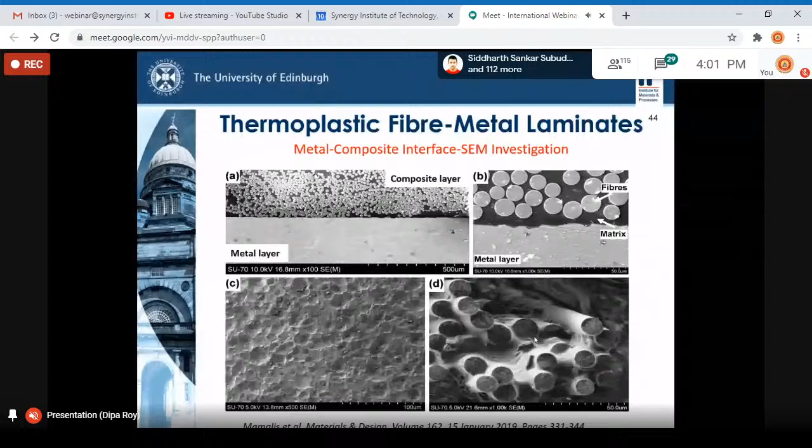Then we tried to optimize the interfacial bonding so that we can get the best mechanical properties out of these fiber metal laminates. Here you see the reference laminate, which has only glass fiber and acrylic composite, a more homogeneous composite system. Whereas with different bonding agents, we tried 6 different bonding agents with different combinations, and we could achieve much higher interfacial strength than in our very first study. The interlaminar shear strength was pretty close to what we see in case of a purely acrylic glass composite.

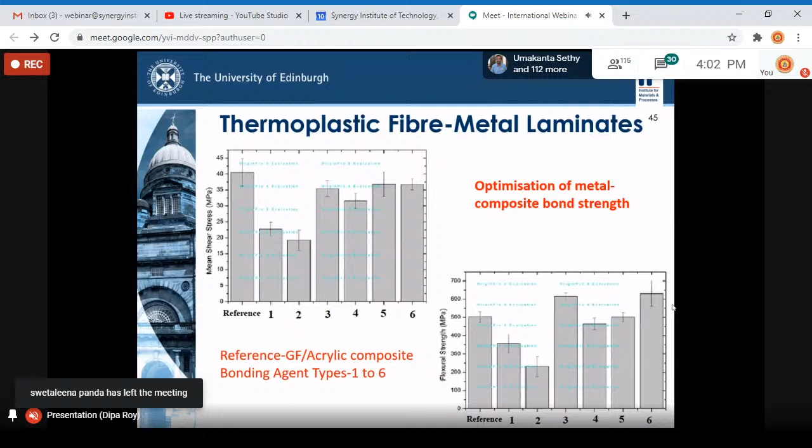So there was a significant improvement in the interfacial bonding by changing or optimizing the bonding agent type. This is the flexural strength. Here again, we could see that with these different bonding agents, the flexural strength exceeded what we saw in case of the pure composite. This was a very positive result from changing the type of bonding agents.

After optimizing this bonding agent type, we then started to find out what our drop weight impact property would be, because for this kind of hybrid laminate, the key point is how good these laminates are in resisting high impact. Aluminum alloys, being highly ductile, can play a big role in absorbing these sudden high impacts, whereas composites don't have good impact properties—especially acrylic, being a strain-dependent matrix, doesn't show any advantage in drop weight impact property. So it's important to find a way of enhancing the impact strength of the laminate, which can work well in many sectors, including defense. This was the main objective for this work.

We manufactured different laminates with different positions of the aluminum alloys, and this was again done by a master student, in collaboration with Cranfield, acknowledging Dr. Hamid, Dr. Pavan, and Dr. James Watson, who were very helpful in the collaboration activity.

Three different types of laminates were manufactured: the first was all glass acrylic composite, the second had the aluminum alloy layer in the mid plane, and the third had layers on the exterior and in the mid plane. The main objective was to compare the energy absorbing ability of these laminates—comparing a pure glass fiber composite with a composite having one aluminum layer, and one having 3 aluminum layers, as well as comparing the results between having 1 layer and 3 layers of aluminum.

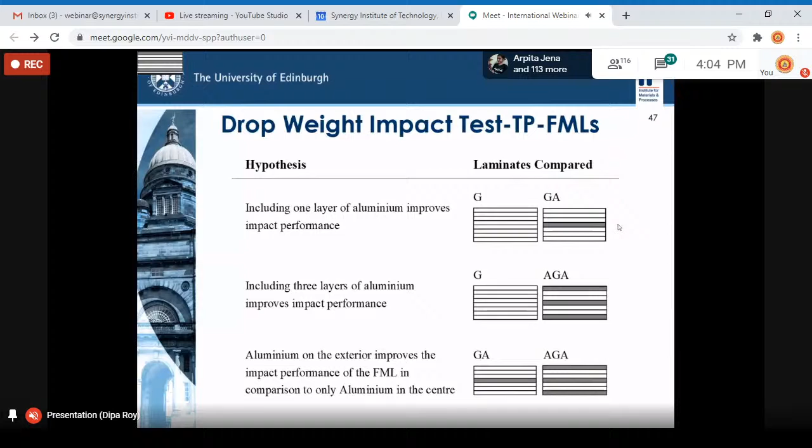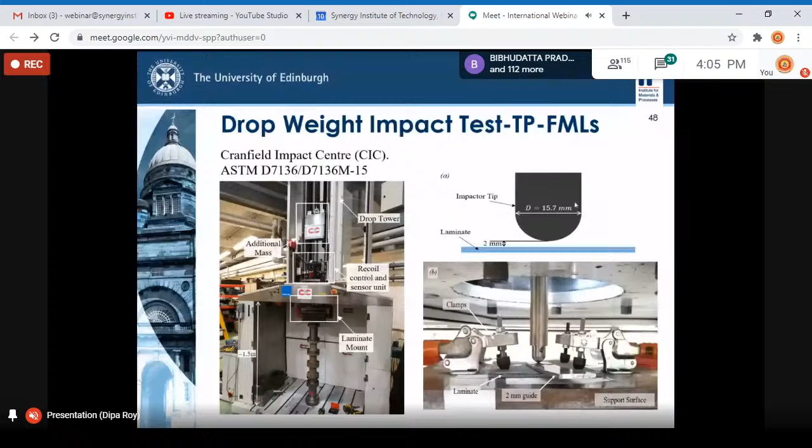So these are some of the experimental plans we made, and we used a drop weight impact tower in Cranfield University. They have a very big impact center with many drop weight impact towers. This is how the indenter, the impactor tip, actually looks like. And this is the standard process of drop weight impact, following an ASTM standard.

In drop weight impact, we can measure the absorbed energy as well as the elastic energy. More absorbed energy means the material is able to absorb energy via matrix cracking, debonding, or some deformation. The elastic energy comes from the rebound of the impactor tip. This is the standard curve we get from a drop weight impact test.

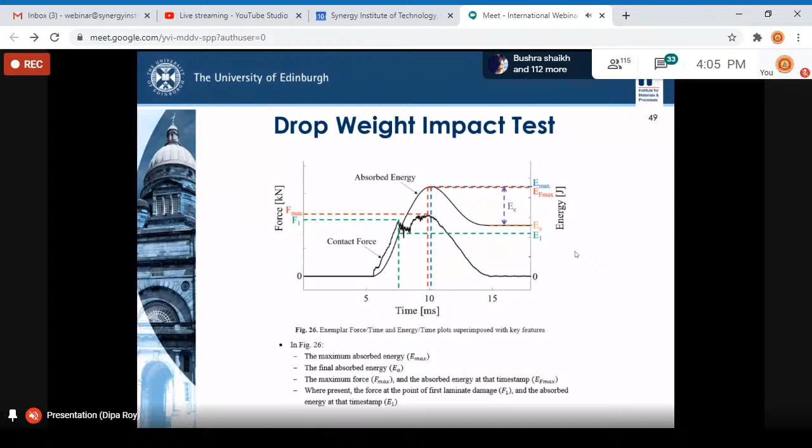This means that if a hybrid laminate like this undergoes a sudden impact, it would be able to absorb a lot more energy. This energy is being absorbed by the interfacial debonding of the overall composite. The aluminum alloy itself is highly ductile, so it can undergo a lot of deformation and absorb energy. This interfacial debonding and absorption of energy by the aluminum alloy can actually prevent perforation of the overall composite structure, so this can be highly advantageous - we can get a lot more impact resistance from these combinations.

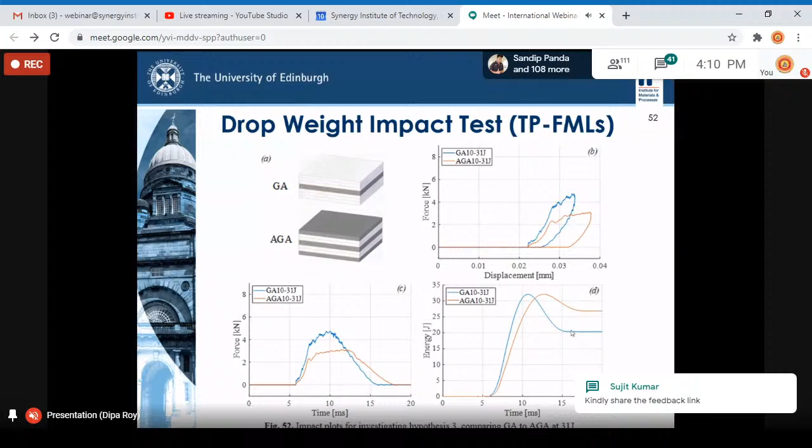Acrylic liquid matrix varies from marine structures to defense, and we are currently also undergoing a UK government project where we are manufacturing these composites for renewable energy sectors.

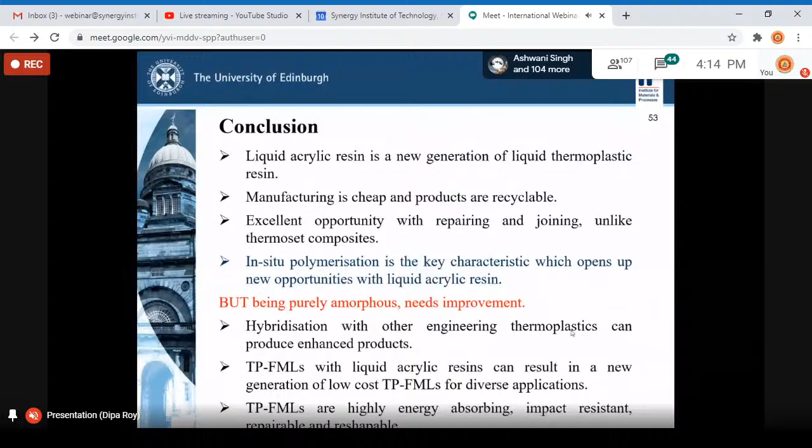Finally, these hybrid thermoplastic composites can be highly impact resistant, and they can be designed in different ways. They are repairable, reshapeable, and we can have a lot of benefits to manufacture products which are sustainable. Thank you, so I come to an end.